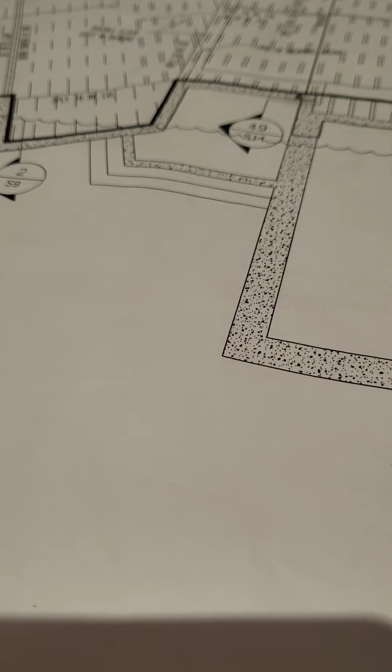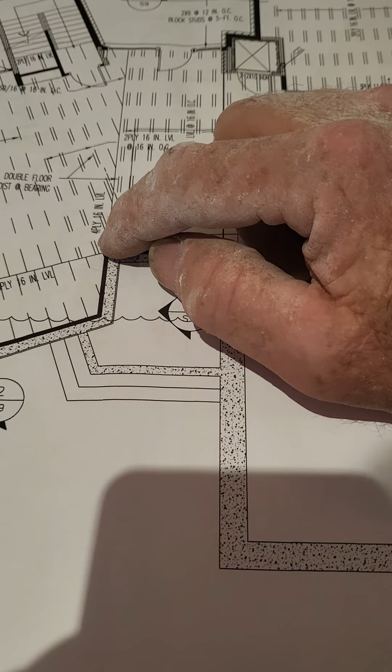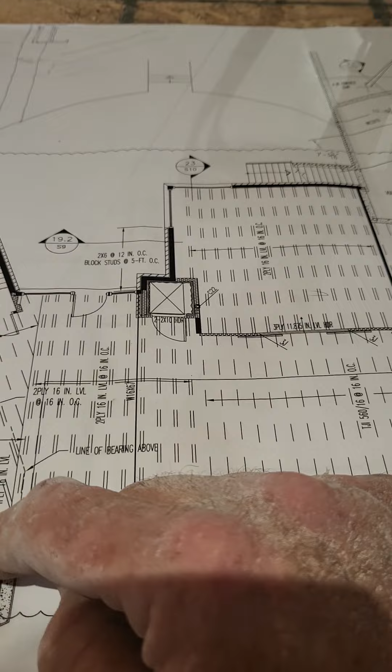All right, I'm trying to chase this load in the foyer again. So we got a 4-ply 16-inch LVL running from foundation. God damn, that's probably overloaded too. Foundation to a W16. And it's picking up all these joists at a, whatever, it's really sharp angle. And then these two are on another LVL.

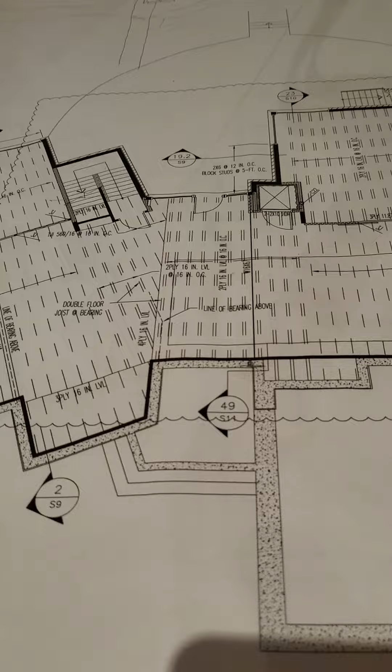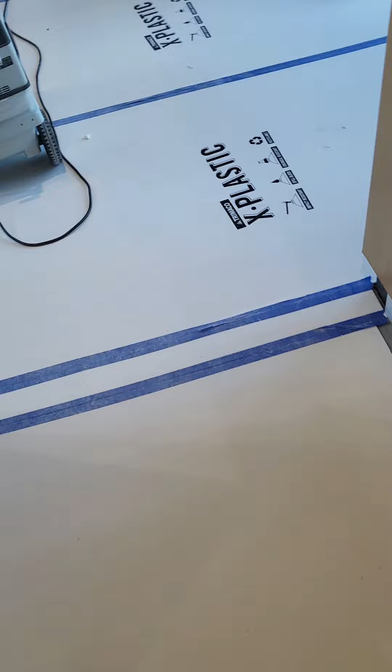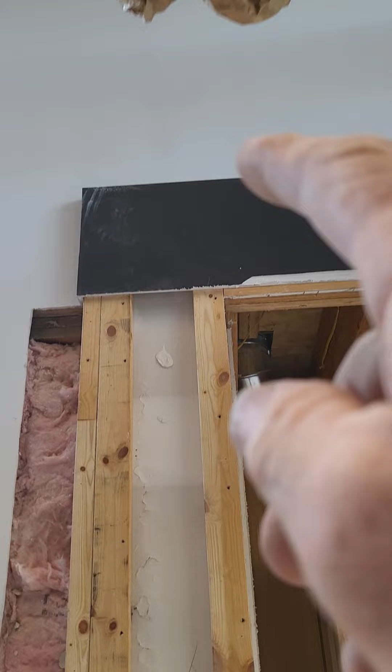I mean, I'm not an engineer, but I really do not like this design. Maybe it works, maybe it doesn't, but it doesn't seem like it's working here. So, let me see here. Anyway, so I had this fear that all that load is transferring down. Now there is a double LVL right there behind that black. So that does, I guess, intercept the load. I can't think of the right word.

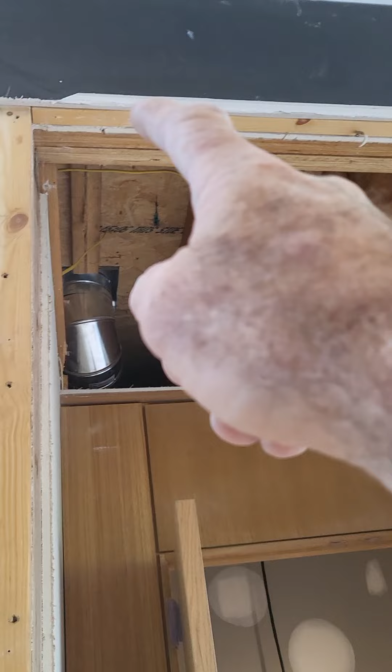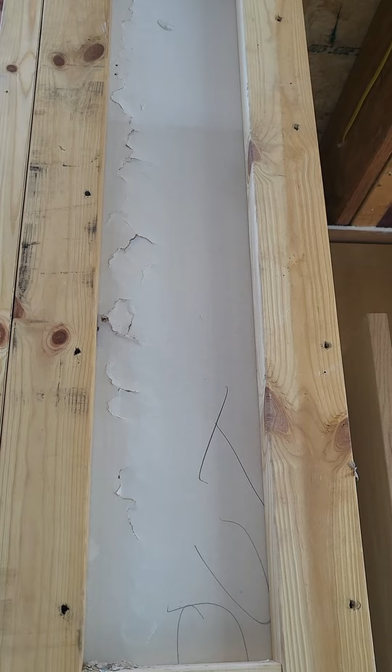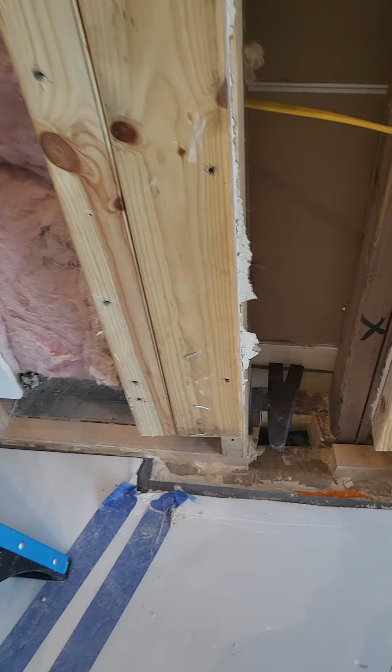But that double is also a cantilever. So the interrupting path of load for the quad is technically a cantilever as well, as you can see. And I've been doing this too long, and I've always done and been taught that you chase that path of load and you stack the studs up all the way down. What my fear is that path of load was sitting on nothing but plywood. And it is.

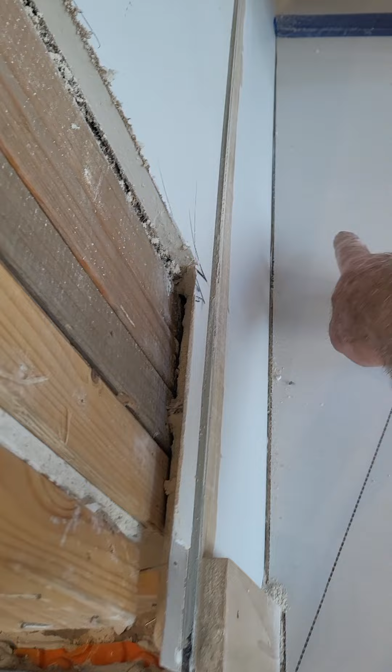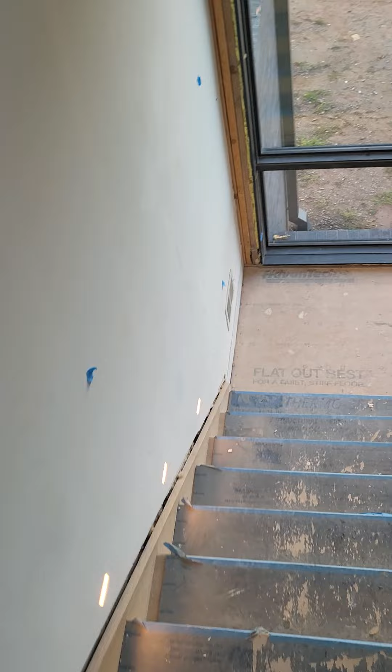So these joists here are basically running in the same direction as that wall. So there's a joist over here, and there's a joist here, but that wall lands right in the middle of nothing. And the engineer never put anything under it. So I came down here again. Set my laser up again.

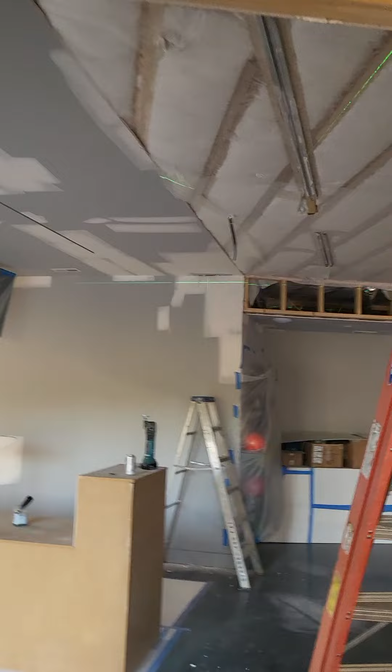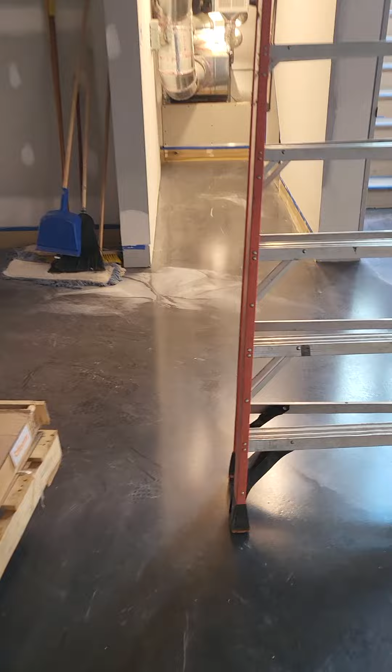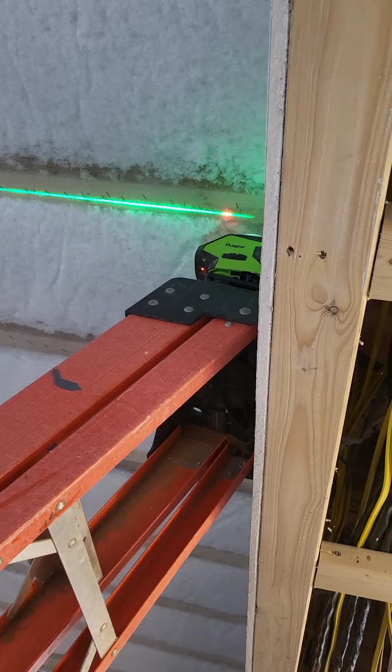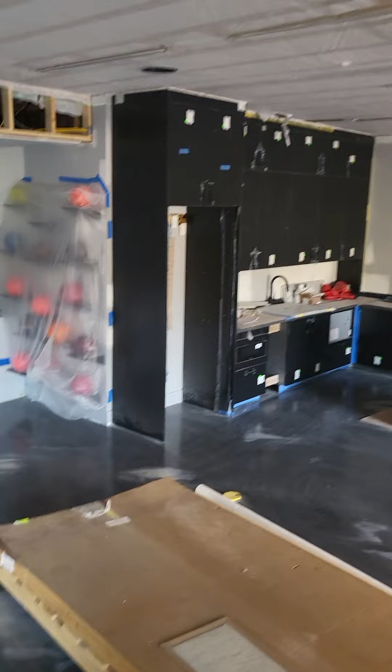And this is just to get me a reading, because that joist that I'm trying to get a reading on is another giant fucking disaster. That's the joist that I'm trying to chase the load to, because that's the nearest joist to where I stuck my pry bar through the ceiling to find the path of load. So in reality, I should set the laser up back there to get an accurate reading, but I can't because I got all this shit in the way, which is probably all going to have to come out now because of another cluster. But so, I'm going to call that 3 1/8.

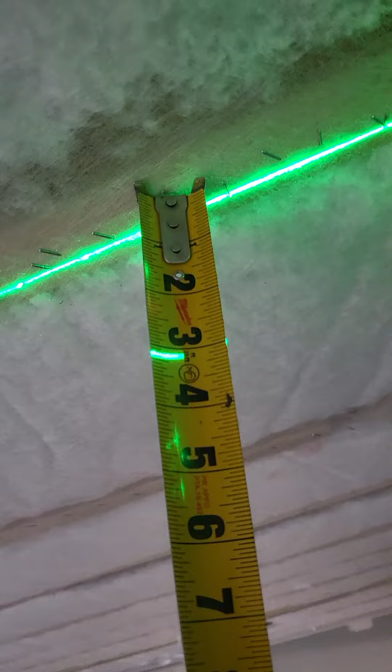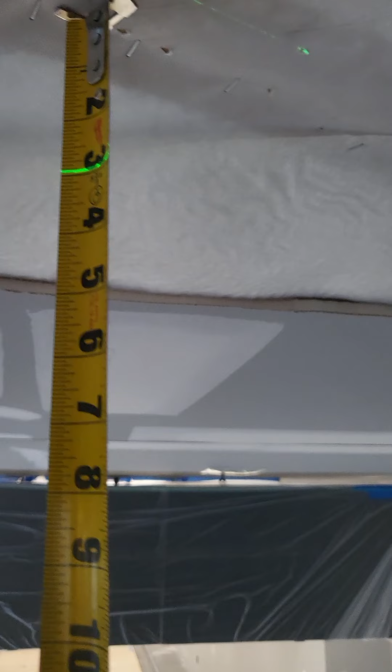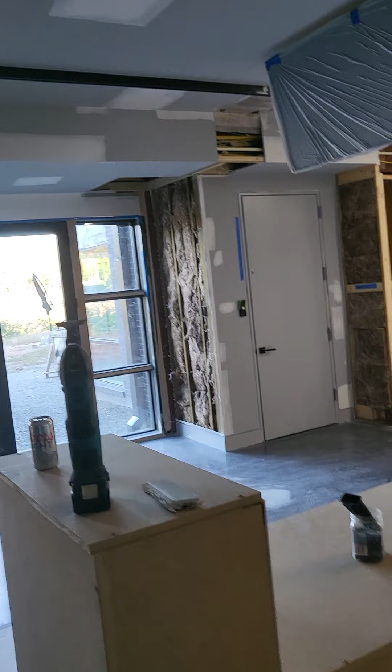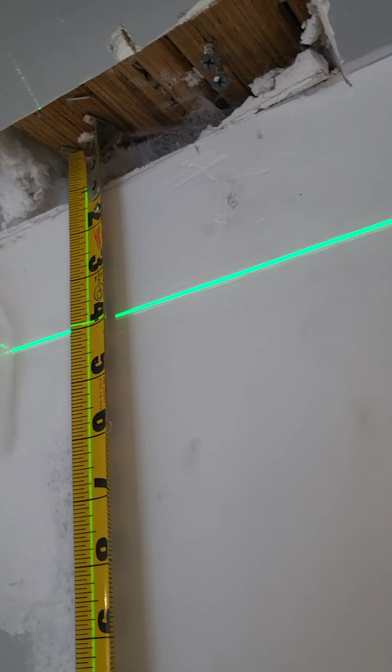Go over here. See, that wall is just right in between these two joists. Pissing me off. Right here, I got like 2 and 7/8. Now, that joist, God damn it. This joist that I'm chasing, right about here, it runs into that 4-ply that I showed you that goes that way. So right here, I got 4. So I've gone from 3 to 4 in 20 feet. I don't understand what in the hell.

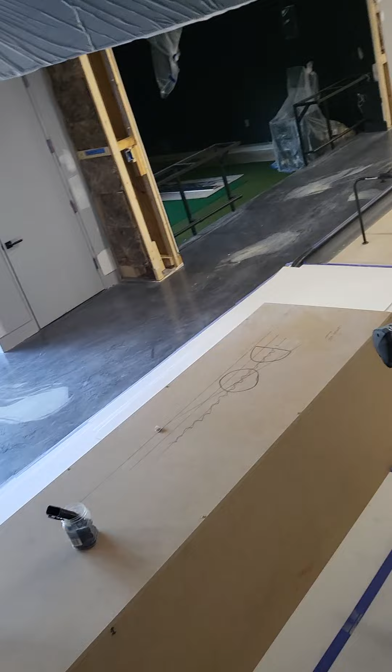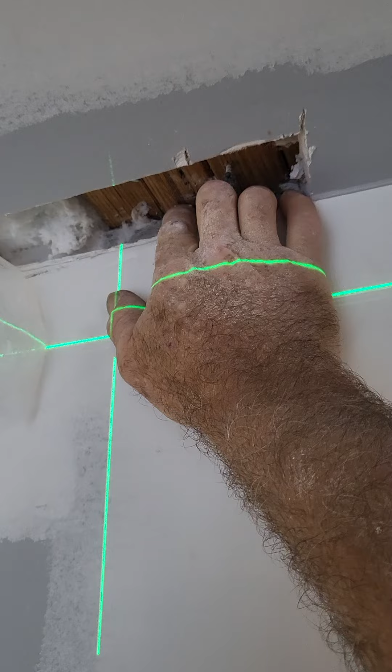And then right here beside it, I got 3.5. 4, 3.5. And I think that's where that other LVL is. Man, this shit is fucked up. But I mean, that's on the foundation. I'm starting to wonder if maybe the foundation isn't exactly level. I got a lot of faith in Richie, but shit does happen. I mean, how do you lose a 1/2 inch in 12 inches?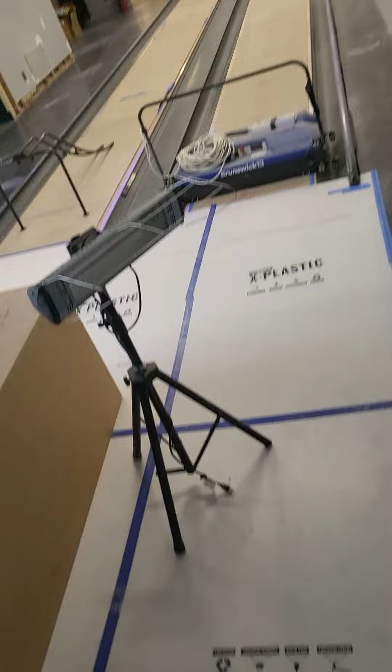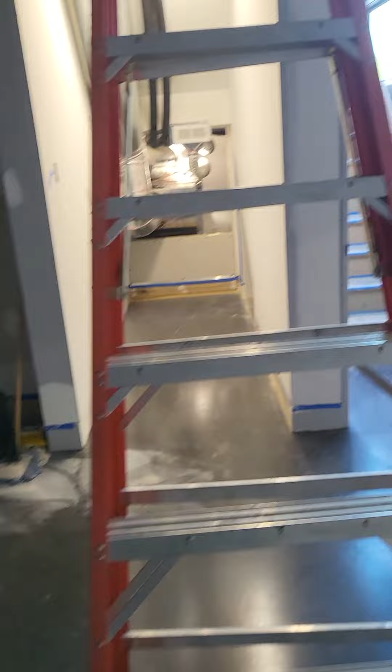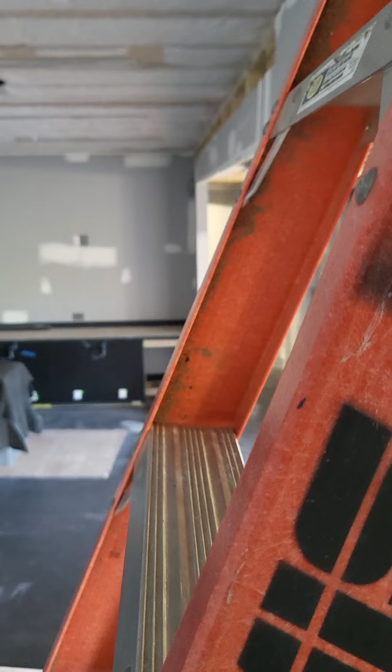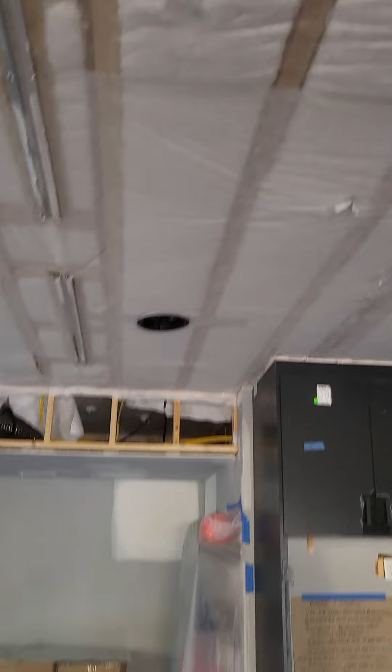But it's kind of a moot point anyway, because day before yesterday, I was still going through those emails, and I only had 10 or 12 left. And of course, the jewel is always at the end. So I found this email where the architect was asking the structural engineer what to do, because Kat had decided she wanted a safe room right about here, right in the middle of everything. It was supposed to have a concrete floor, it's got Kevlar all on it, and it's got steel walls, so it's a substantial load.

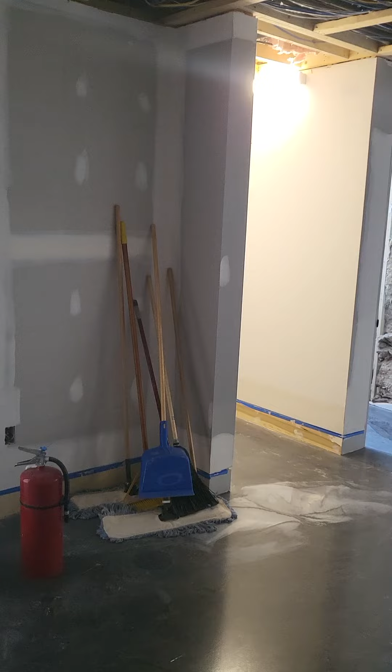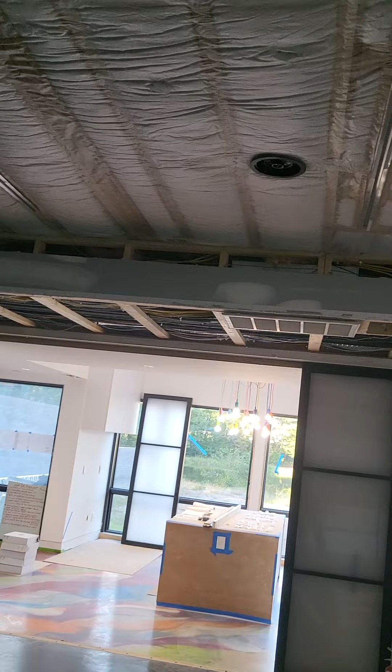So the architect sends the structural engineer of record an email, and the structural engineer of record sends the architect back his prescribed remedy. Well, his prescribed remedy involves a steel I-beam right through here, through here, through here, through there, and through there. And none of that is there. So that was just an email. So I gave it to the new superintendent, who gave it to his project manager, who gave it to our new engineer. And turns out it's supposed to be there. So there you go, dropping the ceiling yet again.

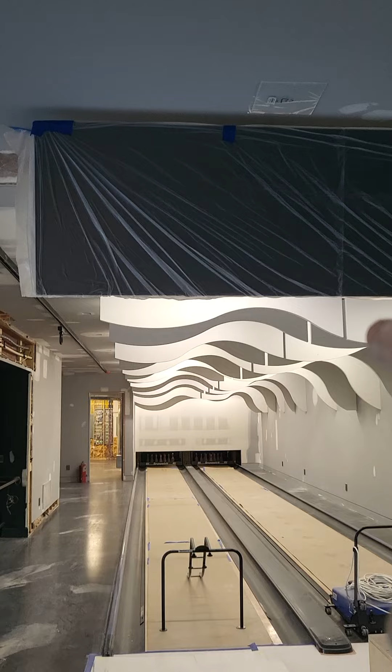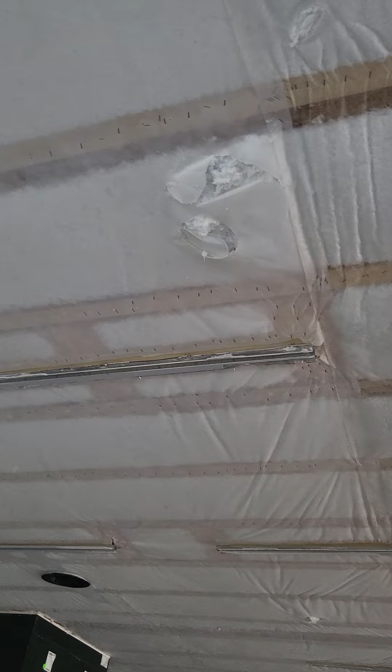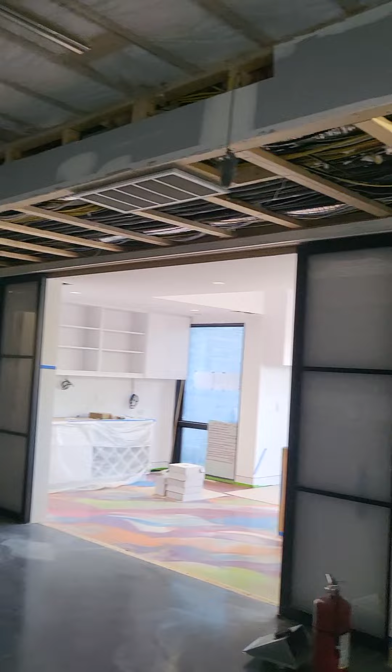And probably going to end up dropping this entire ceiling all the way down, because I didn't mention it upstairs when I showed you my hole, but one, I am almost 100% sure you cannot use loose fill insulation as a fire stop, because you got to test it, it burns. And two, as you saw upstairs, you can't guarantee that it fills the entire cavity. If you're going to use it for fire stop or draft stop, it's got to fill the joist cavity from the sheetrock plane to the subfloor plane. And when I cut that little hole, there was 3 inches of air under it.

So that's all still speculation on my part. We got the big boys working on it to figure out if I'm right or not, but I suspicion all of this is coming down. And then, if that's the wall that's holding all that shit up, there ain't nothing under it. All right, this one's getting ready to get out of control pretty quickly, I think. Well, it's already out of control. But we go home and drink another Bloody Mary.